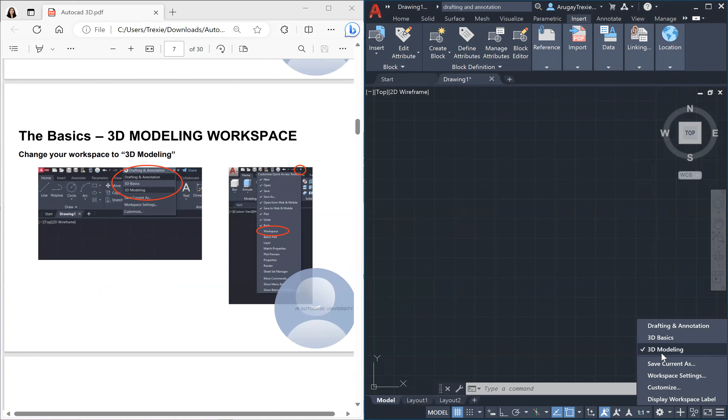After that we will go to visual styles within AutoCAD. This is what I mentioned earlier, the isometric view of 3D AutoCAD, wherein we can customize depending on the required view or instruction. So we will go now to that part.

In the Home tab, let's go to View. From View we can see here that it is set as 2D wireframe. So these are the other types of view.

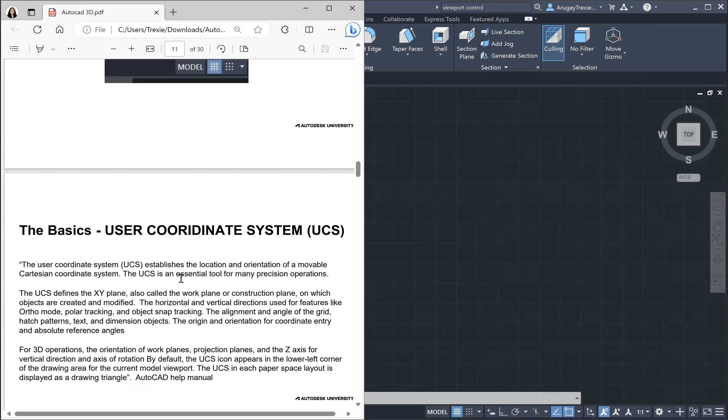So this is the basics. User Coordinate System, or UCS, establishes the location and orientation of the movable Cartesian coordinate system.

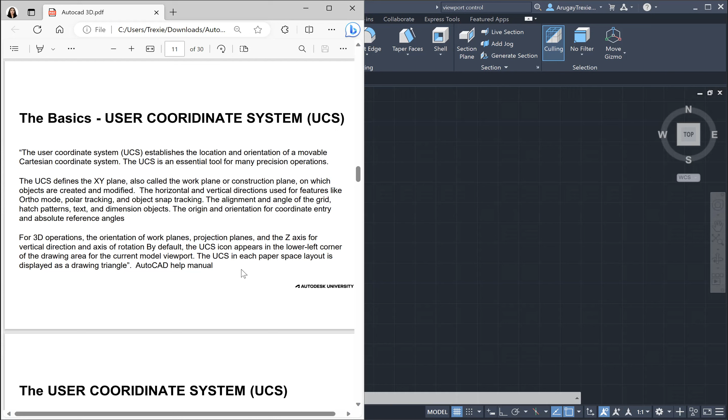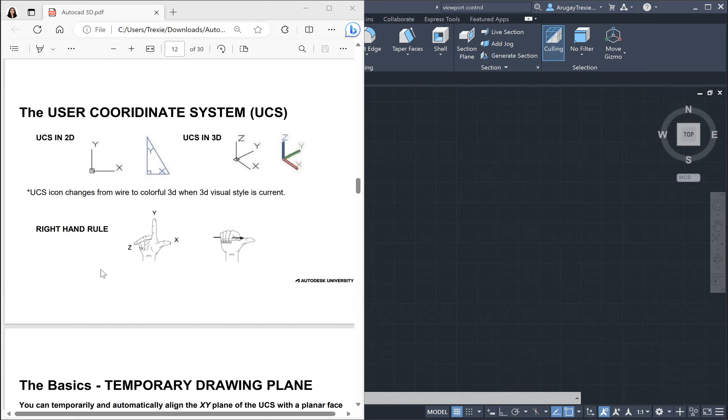Para hindi kayo malito, meron ditong right hand rule. Gamitin nyo lang to para pag gumagawa kayo ng 3D, alam nyo kung anong plane yung natatapat yung object. So yung Y, yung X, and itong Z, ayan. Familiarize nyo lang yung part na yan. So, the basics, temporary drawing plane.

You can temporarily and automatically align the XY plane of the UCS with a planar face on a 3D solid. So makikita natin dito sa first figure, yung Y niya is andito sa may left side. Then yung pataas is ito.

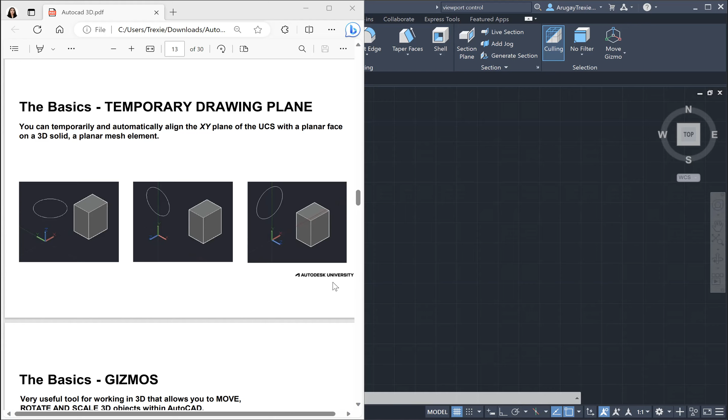So, the basics or yung gizmo, very useful to work on 3D because inaalaw niya yung move, yung rotate, and scale the 3D objects within AutoCAD. So for move, pwede nyo siyang gamitin, move gizmo. Then pag rotate, rotate gizmo naman. So for scale, scale gizmo.

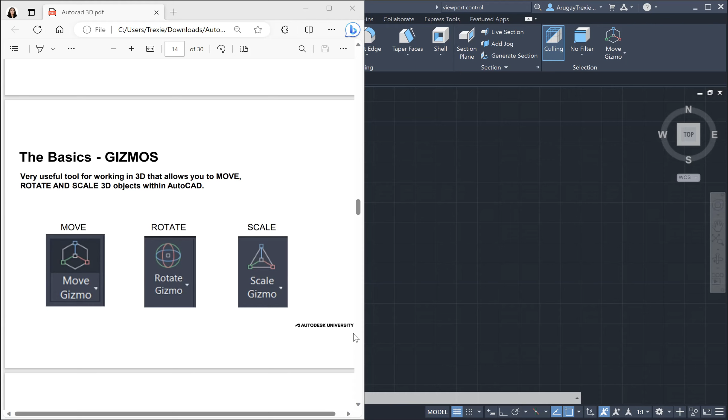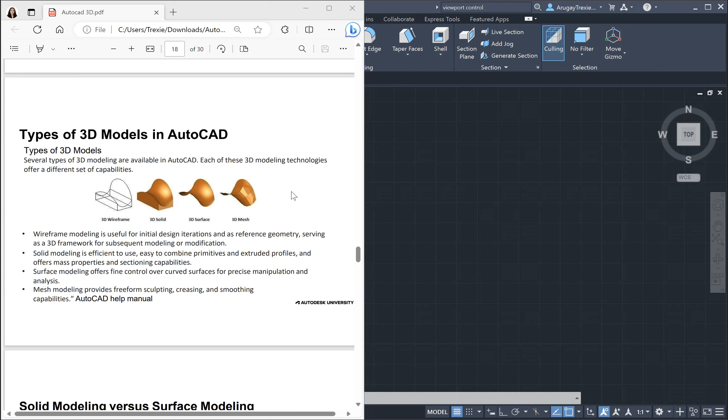Next is yung mesh modeling, provides a free form ng sculpting, yung creasing, and yung pag smoothing capabilities. So ayan naman yun, yung itsura niya is itong nandito sa dulo. Depende kasi kung ano yung kailangan or kung saan kayo mas madadalian, ganun.

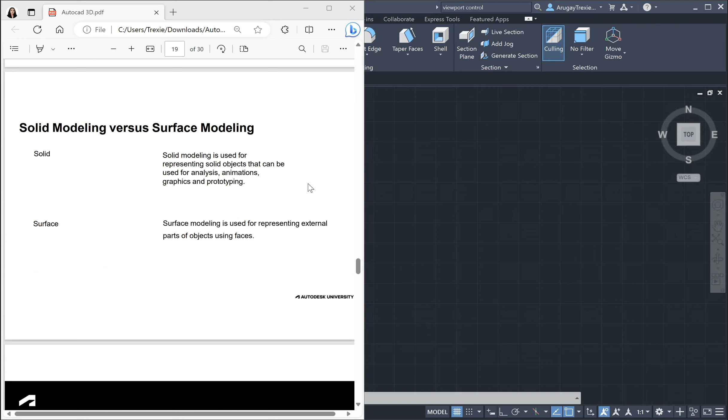So, difference between solid modeling and surface modeling. For solid modeling, this is used for representing solid objects that can be used for analysis, animations, graphics, and even yung sa prototyping. While for surface naman, yung surface modeling is used for representing the external part of object using faces.

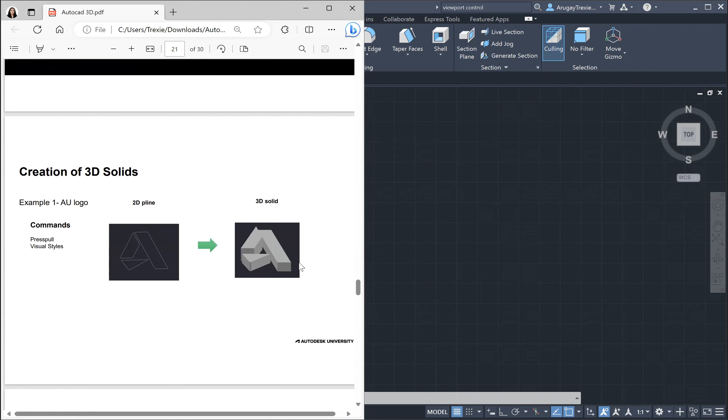So ito yung examples ng 3D solids. Example number 1 is the 2D P-line. So pag ginawa siyang solid, makikita mo naman kung gaano kalaki yung difference. Then ito yung another example.

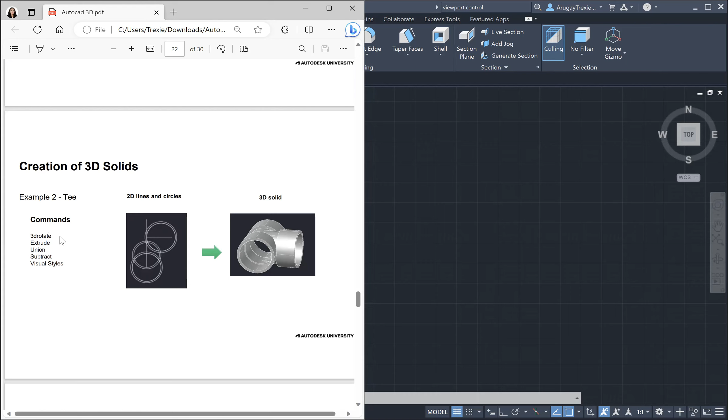Itong nasa left side, yung commands, ayan yung mga ginamit na commands para magawa ito. Though hindi siya detailed, parang nilagay ko lang dito yung mga commands na nagamit, wala siyang sukat or tawag dito, computation.

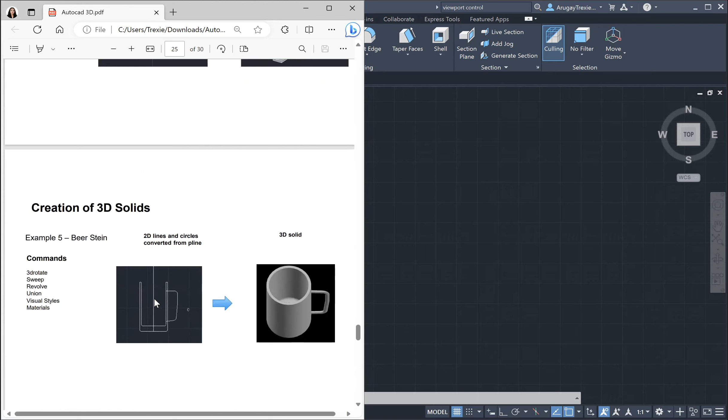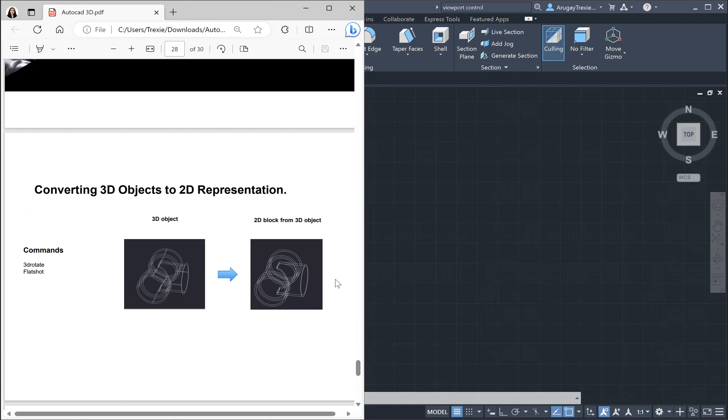Makikita natin dito yung 3D. Then ito naman, 2D blocks na nanggaling sa 3D object. 'Di ba wala namang pinagkaiba kapag kinonvert back.

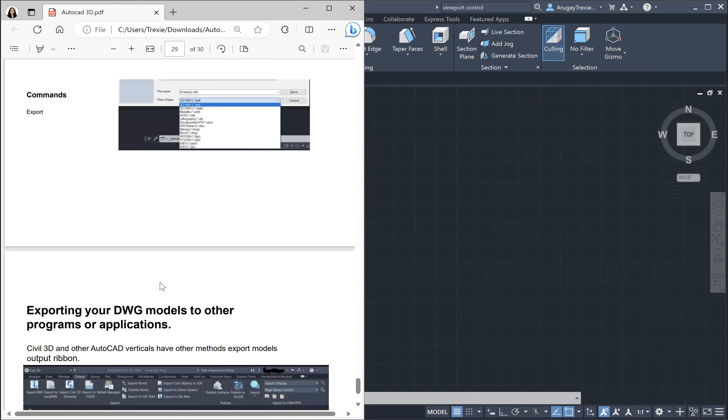So ayun, yung pag-export ng DWG models sa other apps or program, gawin nyo lang yung file name dapat naka .dwf, then after nun i-convert nyo siya sa 3D DWF, then tsaka nyo siya i-save. So, ayun.

Last slide is yung Civil 3D and other AutoCAD verticals have other methods to export. So yan lang yun. Tapos yung InfraWorks, ayun, eto siya, ilagay ko lang dito para makita nyo. So yun lang yung topic natin for today.